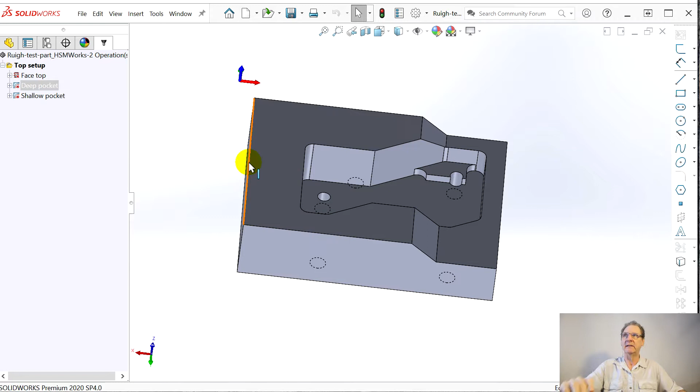Okay, a couple little wrinkles. I started with the part that we finished, or we didn't finish, but the part we started with the pocket and the facing. And here it is, face the top. But you see, no tool paths are showing up. That kind of, I had to edit and redo them. Let's try this, I saw a new button, generate toolpath. Boom, so there they are now.

There's a deep pocket, I think that's only because I made it in the demo program. And hopefully when I close this, we'll know next show. When I open it, the toolpaths will be there, I won't have to regenerate. So we got the top of this face done. Oh, let me show you the stock.

We created the stock. Here's part 0, positive X to the right, the way my Avid Benchtop Pro works. Positive Y to the back. So let us put part 0, all clean, like it better than SolidCAM, which is the most capable, but $5,000 and it's not even full 3D.

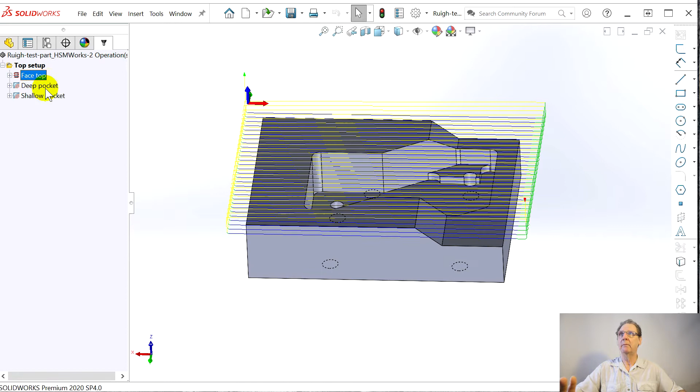So next thing we want to do, as I promised, we want to do the perimeter. We did that, we faced the top, we did this deep pocket, we did the shallow pocket. Now we want to do the perimeter. So let's see, they don't give you the choice here.

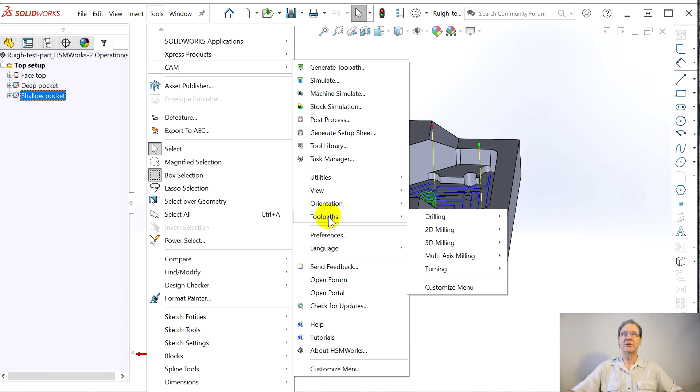I made a mistake in the thing because if you go Tools, CAM, Toolpaths, this is just a simple mistake. Okay, programmers? This shouldn't be called Toolpaths, this should be called the same thing. See, drilling, milling, it should be called the same thing when you right click here and it says Operations. So that shouldn't say toolpaths, that should say new operations.

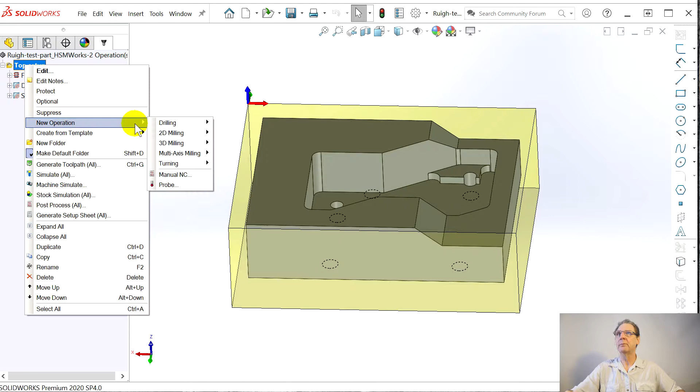So when I went back, I couldn't find it, I was looking for toolpaths here, and really what you're supposed to look for here is operations. Same thing up here, it's the very first one. But in our setup, and setups where you arrange XYZ and put the stock in. So let's do new operation. I've already lost it, look at this. Unbelievable. New operation, it's 2D and it's a contour.

One of the things I love about Visual Mill is it remembers the last tool you used and just defaults to that tool. SolidCAM, you've got to click twice to select the tool you just had, which seems silly.

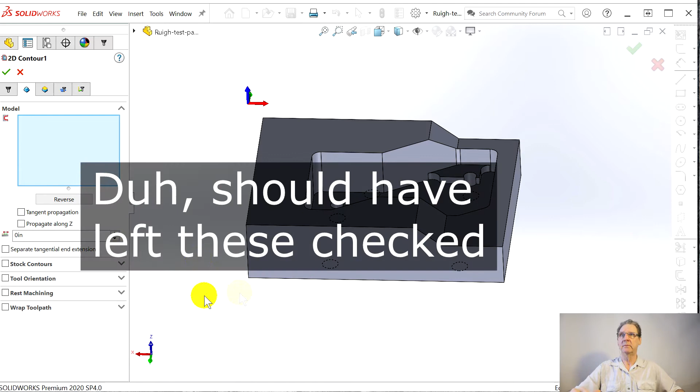For geometry, it always wants to help you, but the general assistant manager default always comes and screws you up. It's probably like MasterCAM, where you pick the edge you want to machine and it makes the direction. Let's try it, clear selection, let's go here. Yeah, so it works like MasterCAM, but they don't tell you.

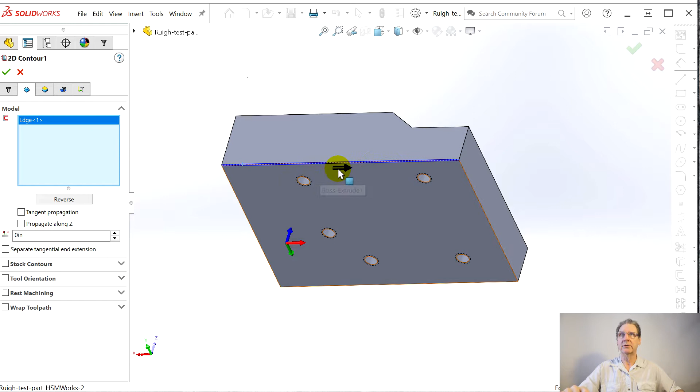To climb mill, I want to go in the other direction. Now it's the wrong way, so let's say reverse. Okay, and then once it's got the direction, it maintains that direction on subsequent clicks—at least it seems to. So there we go, that's all we need.

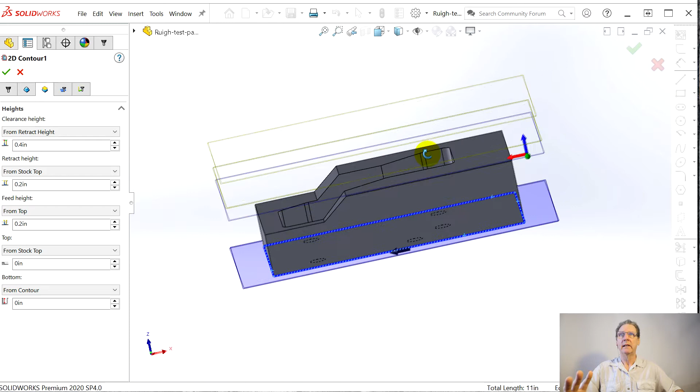I think it's going to need stock contours. Let's just keep going. Now heights, this is pretty cool—it's smart enough, it always wants to go to stock top here, right?

I'm getting to understand, okay, that's the retract. And this is, or no, that's clearance height. This is the retract. The feed height is a little bit below the retract. Stock top is not right.

And this is that thing we learned, okay, this is where they're calling the plane, this is the deviation from that plane. So I could enter a deviation, but really what I want to do is from the model top, because we've already faced this, right? That's where the cut has to be. It's smart enough to know the contour is here.

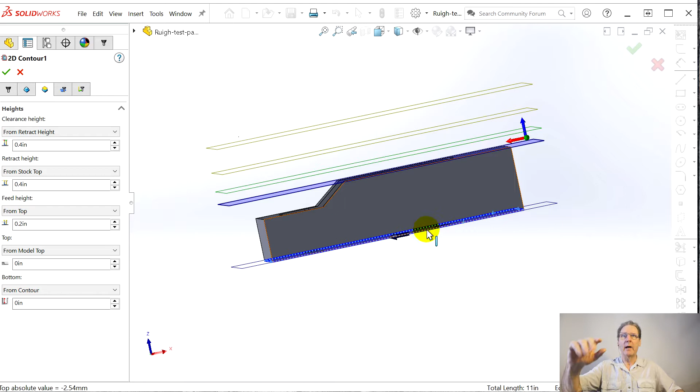But remember, we want to go a little bit below this edge here so that when we flip it over and deck the bottom, there's not a razor sharp edge where mathematically the tool just might have left a thousandth or two. So here we just go minus 0.02.

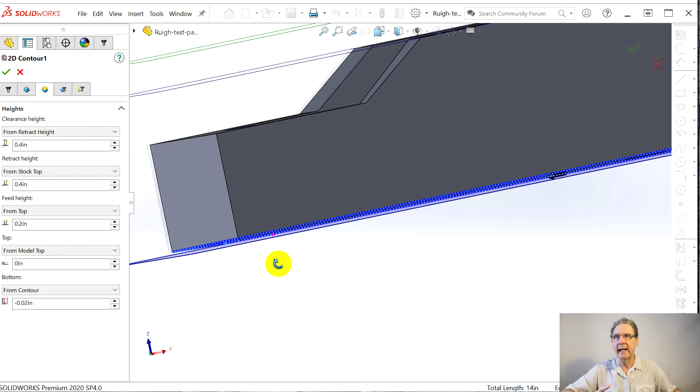I think you couldn't quite see it, but you can see it there—see it? Just that little gap. So now it'll undercut a little bit, or overcut, however you want to call it, and we won't have a sharp edge.

I'm really beginning to love this interface. Once again, you hover and you can see things, what's going on. Radiuses, this is a tolerance. Smoothing, I think this is climb over here—yeah, climb milling.

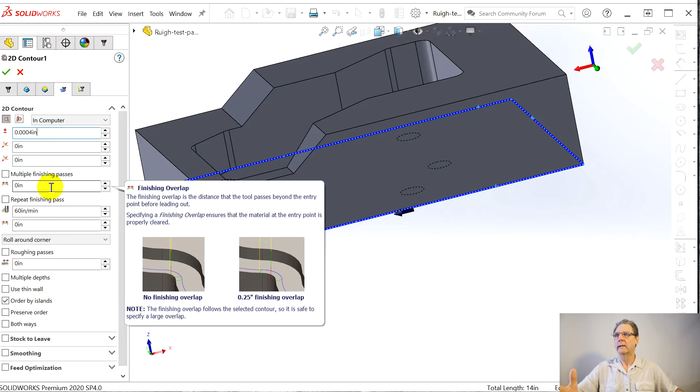Let's see, repeat—it needed roughing pass. See, and then I lose it, I click that, and then I can never find what happened to the word roughing pass. This has been a constant. Okay, there it is. And I don't want to rough that often, I want to rough step over.

Finish only final, even step downs—let's not worry about that. All this is kind of normal stuff for all these programs. I want to go both ways, I want to climb. And then like this linking one, I haven't used it yet, right? So let's see what happens.

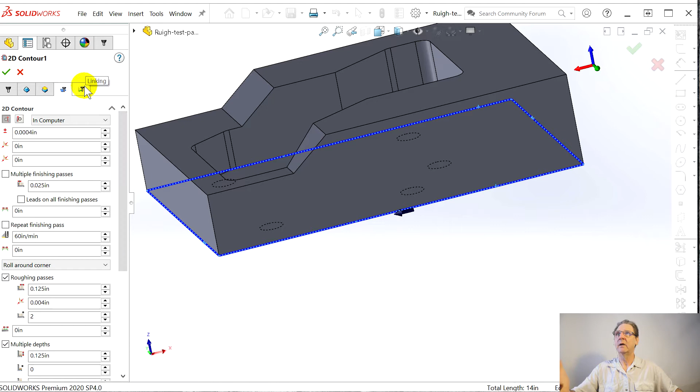There they are. And because I asked for 2 passes, it's doing a finish pass, which I'm sure you can fix—if you just want to do 2 without this thinner, narrower finishing pass. And it should be going underneath—yep, see how it's going a little underneath? Fantastic.

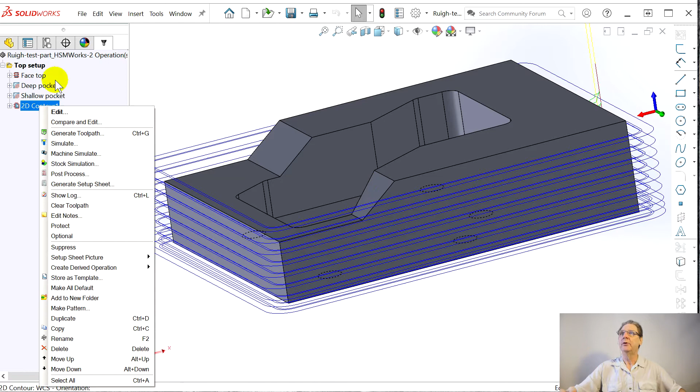And then the simulator—here's the one deficiency, and I consider it pretty major. If you simulate now, the program is not stock aware. It doesn't realize you've decked it, done that, and it'll just show the stock that was left everywhere. You have to simulate it either up here or select them all 4 and then do a simulation, okay? But we're not going to bother because that's a pretty basic thing.

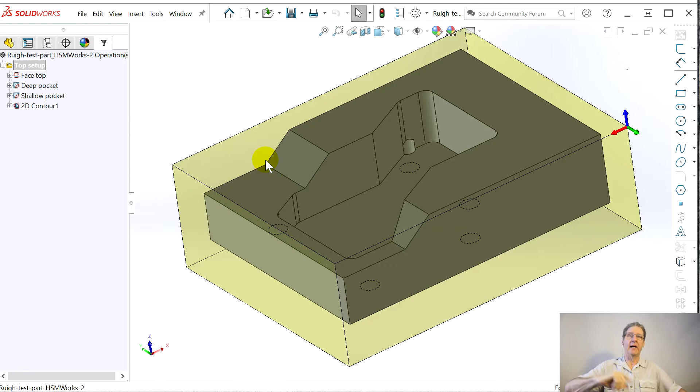Now what's next? You remind yourself, you go up here, it's like, oh yeah, we got to do this flat. Okay, this program, just like SolidCAM, is able to do this without a sketch, just does it a different way. With SolidCAM, you can select geometry point to point, so I could say from this point here to that point there, it draws a line for me and we'll contour and machine off this flat.

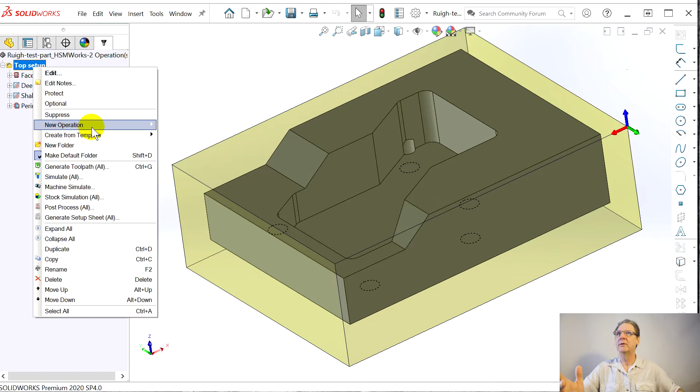This program, let's do a rename—this is perimeter, bang. And then, see, it bothers me, you can't select here, because like if you wanted to do one in between—I'm sure it lets you drag stuff around. You've got to go up at least here, find that new operation, and this is a profile, 2D contour.

Remember the last tool? See how much time we're saving? Now this one, I'll do it a little different. At first I selected both and it got real confused. Then I selected this one when I got it to work.

This time we'll select this one. It's a little, oh no, I had this stuff turned on, always trying to help. Ooh, look, it went and did the correct thing. That's the right direction, I want to be on the left, climb milling. So where the arrow is, cool.

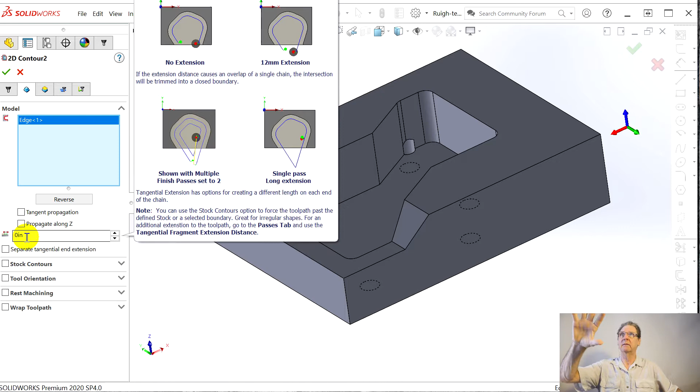And then there is a place, this is here, you hover, extension. I'm sorry some of it went off the screen because I got a multiple screen monitor, 4 monitors. It says tangential extension distance. This is a way to extend that tool path. So you can do both the beginning and the end, which we're going to try to do. Now, I think it doesn't say which is which, does it?

End extension, so we hardly want to extend at all. Let's do 0.1, see if it fixes it for us. But beginning extension, let's hover over here and say, come on, hover here. Well, it doesn't say beginning or end, but the beginning we want to do, what, 3 inches.

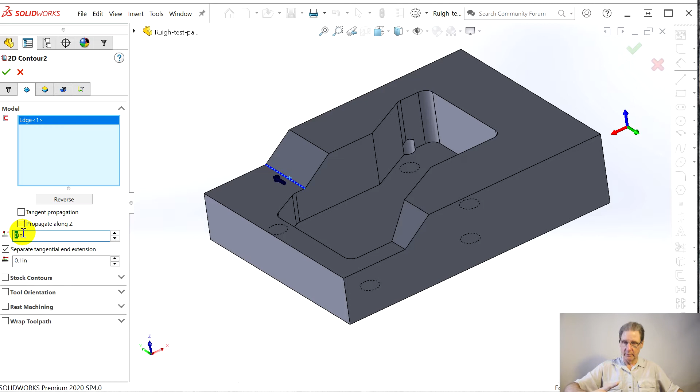Here, it's got it right, although once again it's stock top, it should only be model top. Keeps making that mistake, that's a little exasperating. This stuff, it was that roughing passes. See, where does it go? Okay, it goes here, I guess I see this, it rolls around the corner and gets confused.

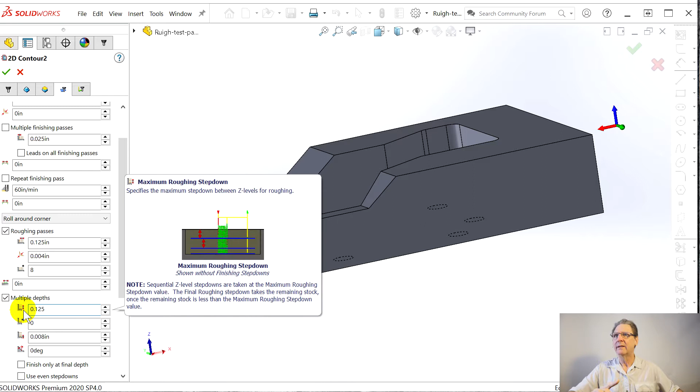Same thing, I want to go 125 and I want to do, I think I said 8 passes, 7 or 8. It's kind of silly you have to do it that way. And multiple depths. Oh, look at that, it lets me, the scroll wheel was changing that value, 125. I think that's all we got to worry about, right? Step down, finishing step down, we don't care.

Finishing step down, wait a minute, what was that? The size of each step down in the finishing, 8 thousandths. Oh, we'll let it do its thing, right? All of this, I'm sure. Then, let's say generate toolpath, see what happens.

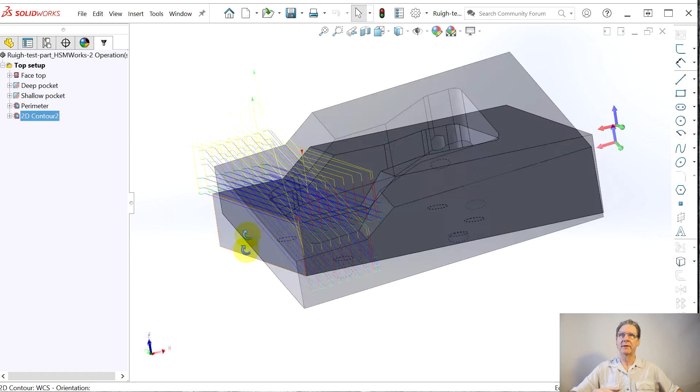There it is, I guessed it right. 3 inches is obviously too far. We can go change that. See, it dismisses the dialog every time. It's a little clumsy, but that's not the end of the world, right?

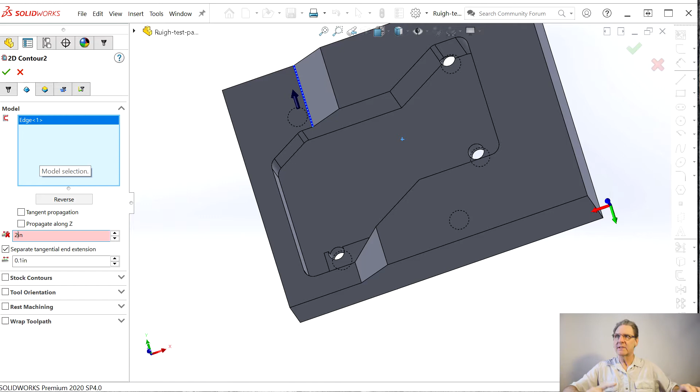So where were we? Geometry. Instead of 3 inches, let's do 2 inches. Did I hit one by mistake? 2 inches, and say yes. That wasn't enough, see, this is where it gets clumsy. You gotta go edit, you can't double click to invoke it. 2.5.

But there it is, right? Fantastic. So rather than, what do we got, 13 minutes in, we're going to really rock. Now we're going to do a 3D.

We want to do these slopes like we have in all the programs. When MasterCAM does them, okay. BobCAD, you got to do 3D extents to kind of fool it. With Visual Mill, there was fooling around with the tool. Watch how this one does it.

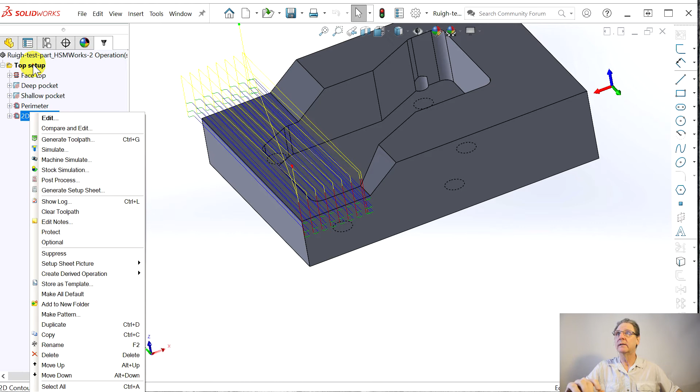It's great, let me see if I can. Oh yeah, you don't do it here. It's a little annoying. Oh, wait a minute, this is flat.

Okay, go here, operation, 3D milling, and it is a parallel operation. Same tool, that's a genius. This part was designed by my buddy Dave to trip up CAM programs with automatic this and automatic that, but it's mostly this tool.

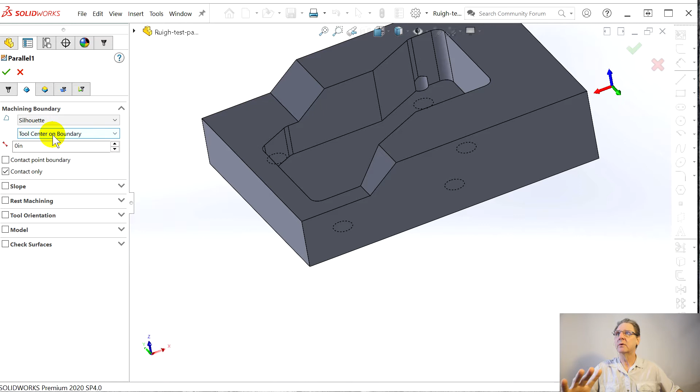You don't want to do, you want to select them, select this patch and this patch. And then I think that's it. I don't think you got to do that. I don't think, see, it doesn't matter.

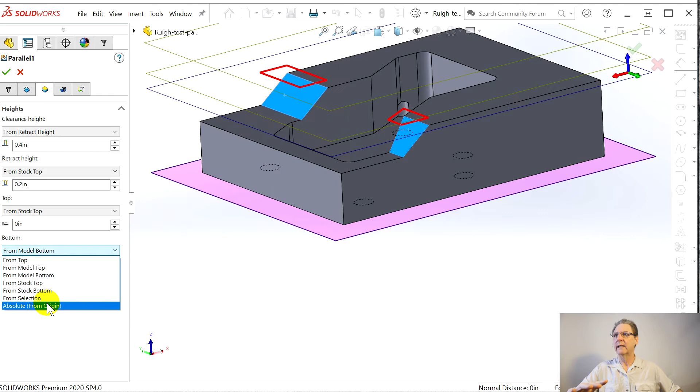Then here, the heights, from stock top it's got. Let's select this one, we only want to go down to this level, so let's put the face there. Here it's done it wrong again, from model bottom down there. Okay, so that's cool, everything's happy.

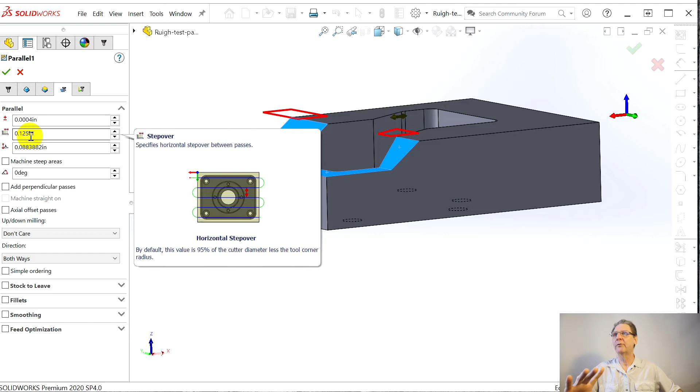Parallel, this is all the tolerance business, step overs, this is where we want a fine step over. And watch how wonderful this is. Just hover, great help. Unlike BobCAD, zero help. This is fantastic, like Visual Mill.

Cusp height, the SolidCAM help is good too. Cusp height, so this is telling us, I assume it's smart enough. Of course, see, it's already assuming it's a ball mill, and that's Dave's genius. No, you leave a flat end mill and you come down this ramp. Instead, I was taking a ball mill across at first, big mistake, but it's smart enough to do the math for you.

So if we say, no, I want 0.02, it's saying, well, at least if it was a ball mill, that would be the cusp. I don't think we're going to be quite that bad because of the angles and the geometry.

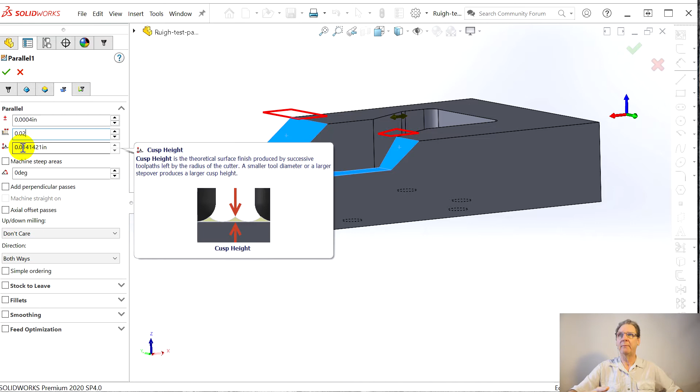We'll see, this is the degrees, whether you're going this way or down. I think I left that there. I want climb milling, I don't see both ways—one way, I guess that's as close to climb milling. Let's say, do it.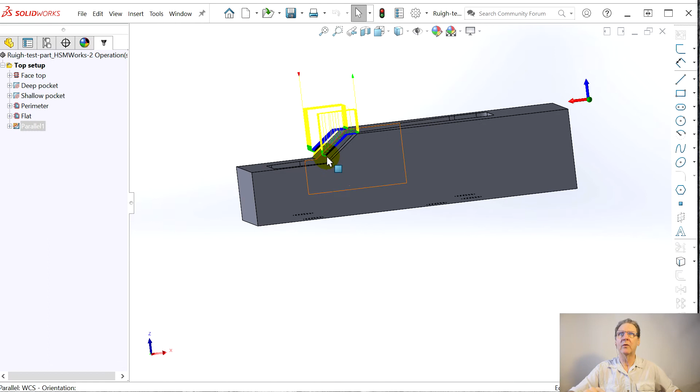Okay, so like VisualMILL, it only goes to where the center of the tool touches the thing. Now that's going to be in here. Let's change the name to slopes.

And can't double click, you got to right click edit. Minor annoyance. Where was it? Would it be in passes? Something about the tool, maybe it's in geometry. Tool orientation, was that it?

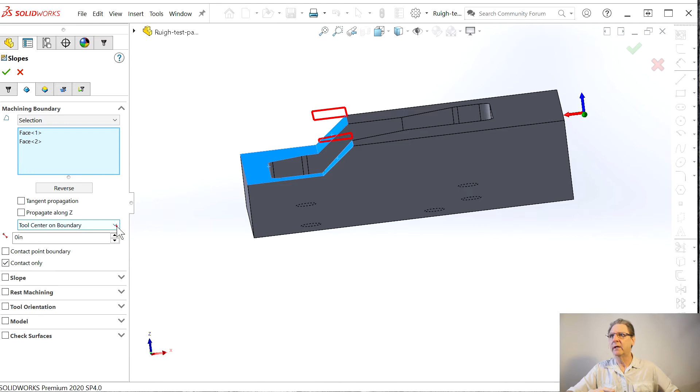No. Oh, tool center on boundary—here, so tool outside the boundary. Now do it. And see, now it's going, it lets the center of the tool cross that boundary and goes to the edge. And when I was doing VisualMILL, I think it was the same kind of thing.

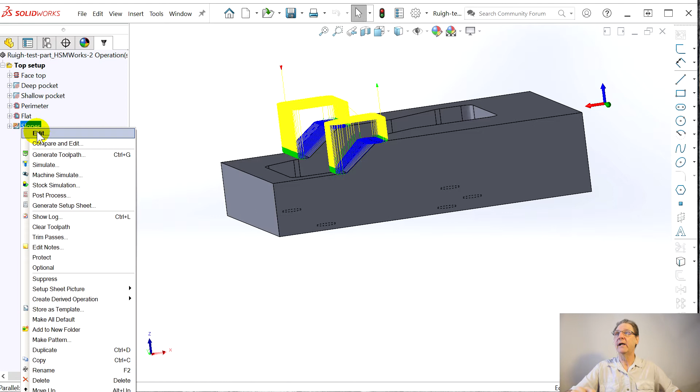And you're like, oh, it's going to scuff the top here. And because it goes all the way here, it's going to scuff. Watch what the fantastic Danish programmers did for us. I'm not sure I can find it real easy.

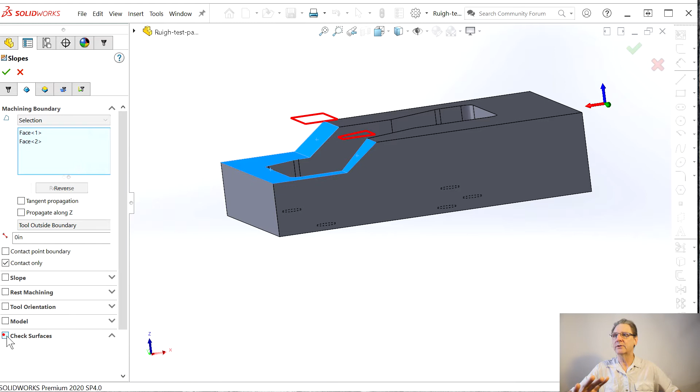Check surfaces, it's in geometry. So you can say—and I think, well, you remembered that it was doing the top. There were tool paths up here touching the top. Watch this, check surfaces. This is a check surface, and this is it.

And this says don't get any closer than 4/10,000ths. Well, my mill probably isn't that accurate. Let's go 1,000th, which means the tool, when it comes down here, it'll stop 1,000th shy. It won't touch that surface and scuff it, but it'll just have the tiniest little 1,000th inch step in the corner here that will be probably unnoticeable, right?

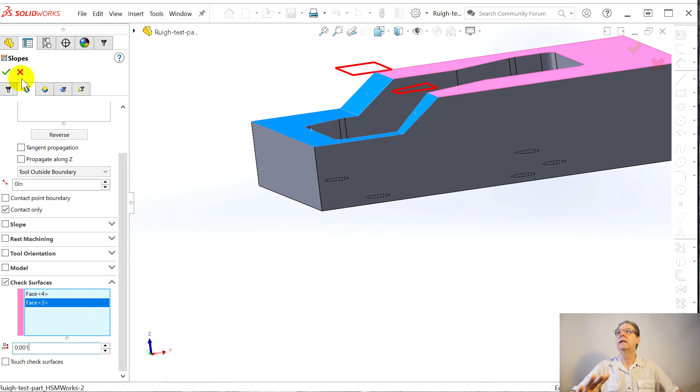Let's go here, I'm so excited, this is the coolest thing ever. See? Notice how all that tool path up here disappeared. The other thing I love, you're in SolidWorks, so this kind of stuff works, right?

So there we go. Now, minor annoyance, like I say, if we simulate now—well, let's show you why this is goofy, you'll understand what I'm talking about. I don't have a machine defined. That'll be another show when I figure that out.

For now, it's just stock simulations. This simulate is like what MasterCAM calls backplot, or, it just does a toolpath. There's no stock, there's no nothing.

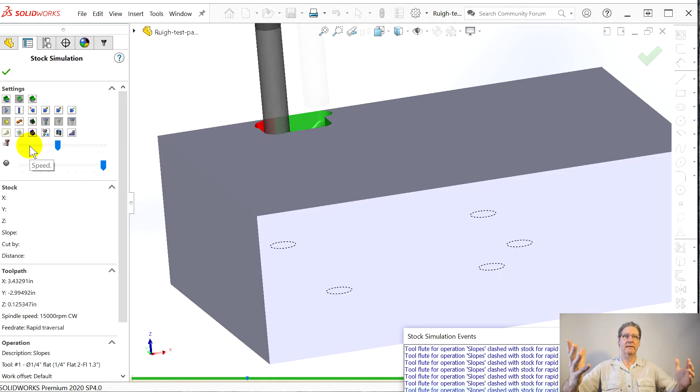Stock simulation. Now, if I go, yes, see, it's not stock aware. It doesn't know that, well, no, none of that's supposed to be there. And it shows all this stuff in red and who knows what's going on.

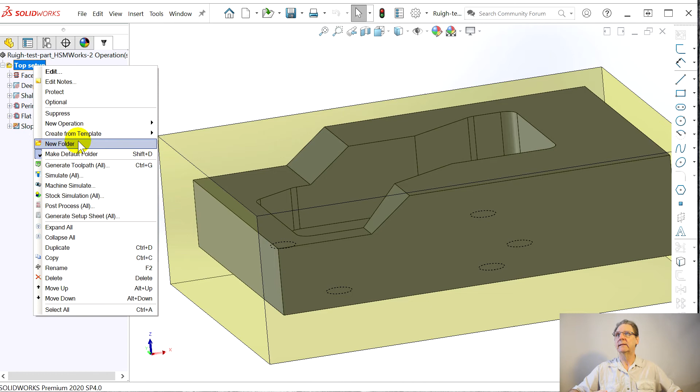So to get the simulation you really want, you could either select pertinent ones, like I was holding Shift key, hold Control key, you can select certain, but just as equally, you can go up here and click and say, not machine, stock simulation. Stuff still hops around.

And then this one you can do here, generate stock until next. There was the top, there's the deep pocket. Let's move it so you can see where once more. There's the shallow pocket, notice it's not leaving those artifacts, those little stripes this time.

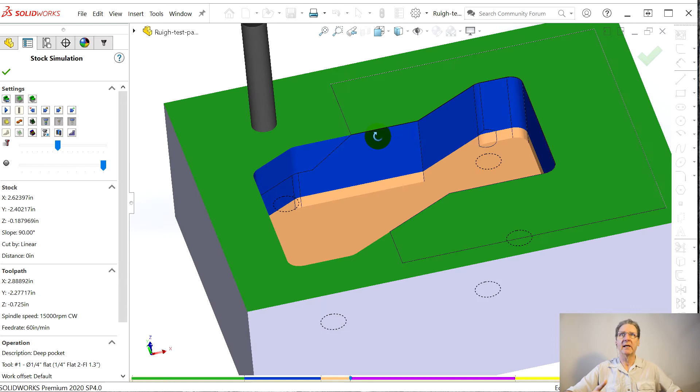It's actually cutting clean, which is kind of cool. Don't know why, my rounding error is different. And then what are we going to do? We're going to do—you can trust me to say, yeah, the perimeter, it's undercut. Now we're going to do the flat. There's the flat, and now we can simulate what we want to see.

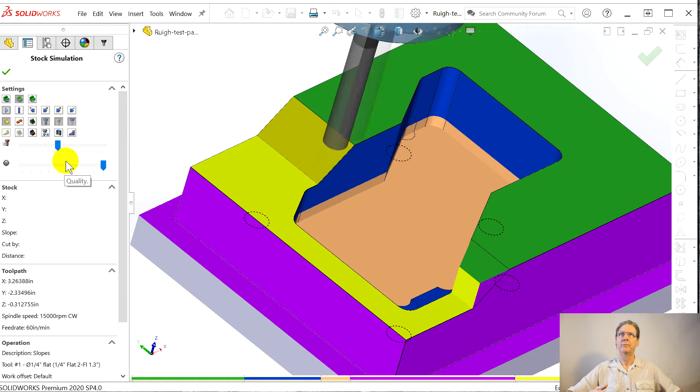And unlike the other programs where, because of the mathematics and the geometry, it would leave a little stock right here, this one isn't. Right? I think MasterCAM worked like that. There's no excess stock right here, right, on that corner.

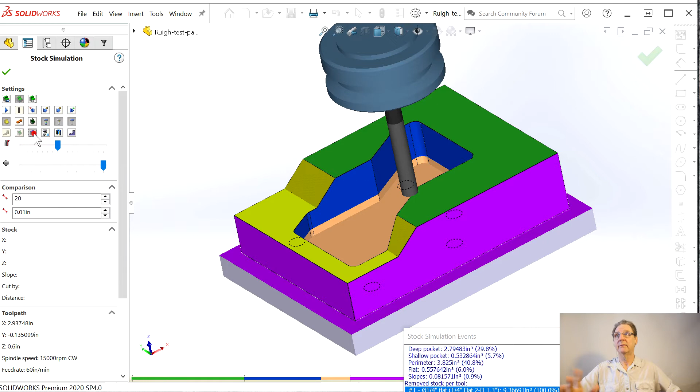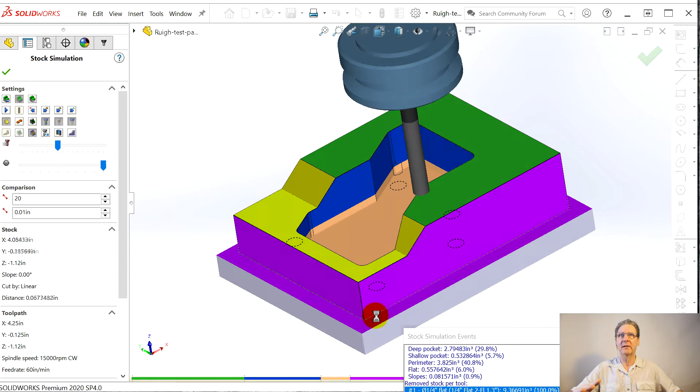I wish I had the SolidCAM simulator, or Visual Mill works the same way, or even SolidWorks CAM by CAMWorks—color codes. Why they use 20 shades of gray, and you can set that. I'm going to do, it's hard to see where the gray starts and the different shades of gray. Let's go up here, I guess you can kind of see them, right?

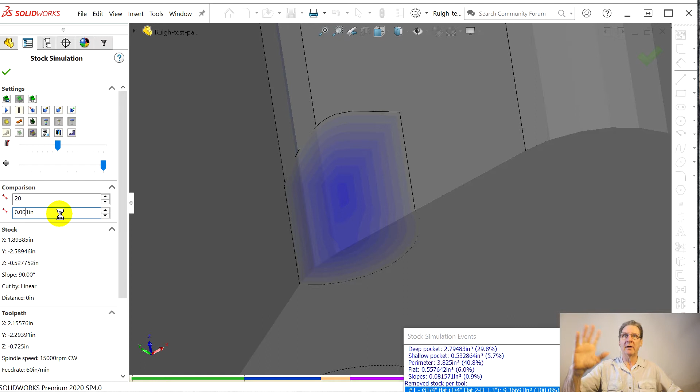This is the Steve Jobs school of a pixel different, and you're supposed to think it's clean and cool. I add a 0 right here to the, how much per shade. So there's a 0, it's smart enough, it's fantastic that they do it. And now you can see there's 20 shades of gray, just 1/1000th of an inch each.

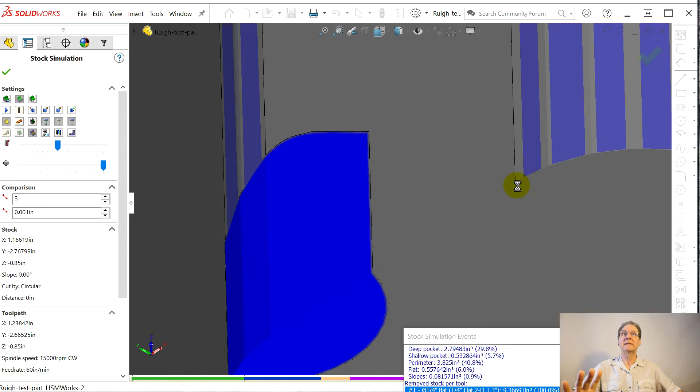You can also do—I was playing around—3 shades of gray. Or no, that's 32, sorry, 3 shades. And it becomes even a little crisper. But that's showing some, not artifacts, but I think that's really saying there's math. Is it rounding error in the math? Why is stuff showing up here? This is probably operator error, but it's still, it doesn't get me as confident as the SolidCAM simulator.

SolidCAM, boy, my brain's spinning with all these 10 different CAM packages. But good enough, see, you're not in that horrible simulator that MasterCAM and BobCAD use. They use a ModuleWorks simulator. So here you are, fantastic.

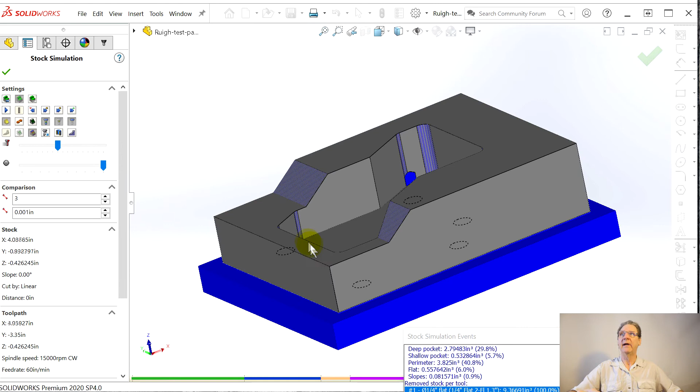When you don't have the compare function, it color codes each tool, each operation a different color. So that's cool, we're done. Let's see, we got 10 minutes left.

Okay, so next we want to do what a machinist would call a setup, what everybody I know in the history of Earth calls a setup. They've decided it's called a job, which is what the whole part is. But that might be a Danish-English translation problem.

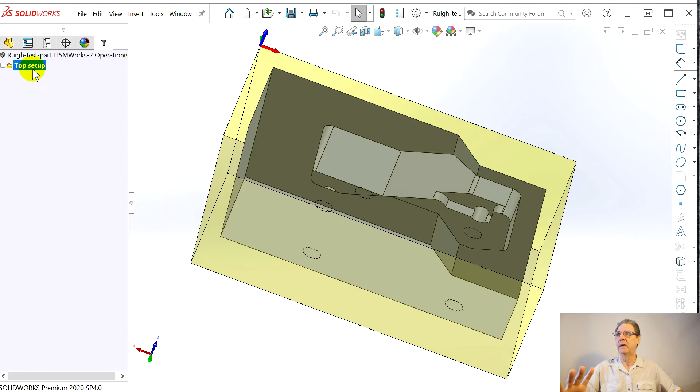Right click here, I think it's look for the new job, new operation, new folder. No, you can't see, you got to go up here. Now if you have the evil of all evils, the command ribbon, then you can do job up here, right? But then that robs down here, and this is amateur hour. And why are you going up here?

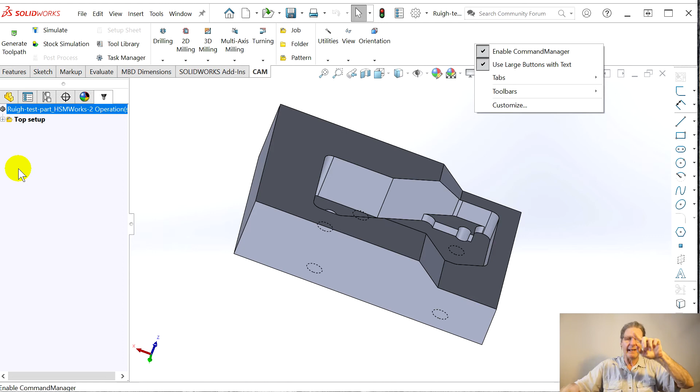Everything you want the mouse to be in this area. That's what's so great about not having these giant dialogs like BobCAD and SolidCAM. You're always concentrated in this one area. And this fallacy of, well, if we spread everything out and put all this space, it'll be simpler - it's not, it's worse. SolidCAM does that, and they don't label any of the icons. And you got to hover, and okay, that's what that is.

I got to do that all concentrated here. So enable the command manager. Go back to what we were doing. Sorry for that rant. New operation, no - new job, here it is. I can't figure out, you would think continued machining from previous job.

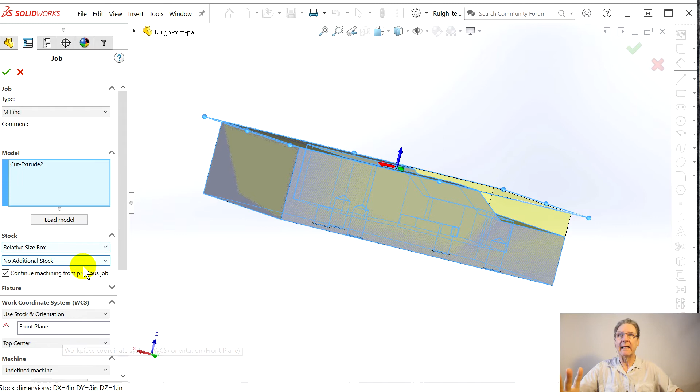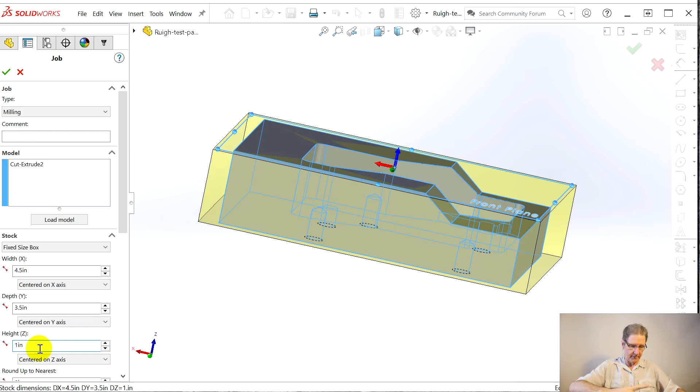But it still has stock. And it took a while to figure out, oh no, that's the relative size stock. See, it's here, so you got to do it all over again. This is madness, this is truly a major deficiency. So you just got to do what I already did once, 4.5. At least they do things, once you're used to it, like anything. This is why the programmers or the marketing people don't think it's a problem, because everybody's used it their whole life.

So you set the size, and then you don't want to center on Z. What is it, Z plus, I think. And then you can make that number smaller, I think make it 1/10. And that's where it was, right?

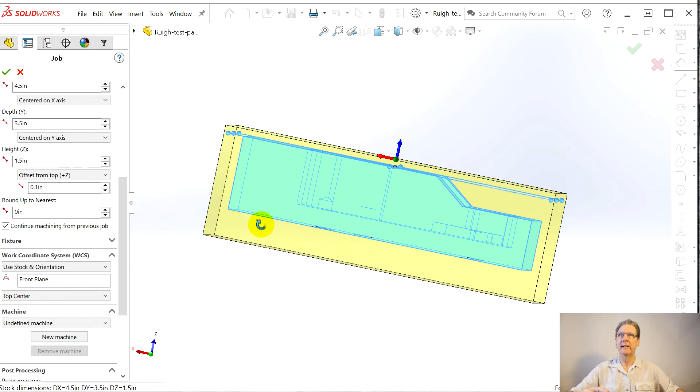Next problem is the coordinate system. We're going to flip the part around like that, make work 0. You can't make work 0 the stock now, because thicknesses in stock will change the thickness of the part. You got to refer to the part itself. So this will be a little misery.

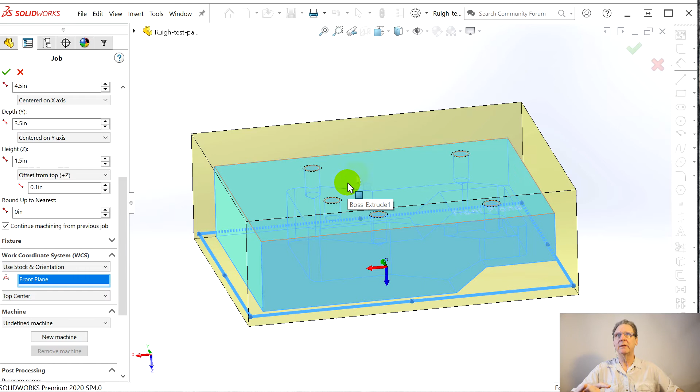Does it let me reverse? Maybe it'll let me do this one. Yes - now did it move the stock on me? Yes, it did. So now we got to go up, up, up, 4/10 up. Okay, so now the stock condition's right.

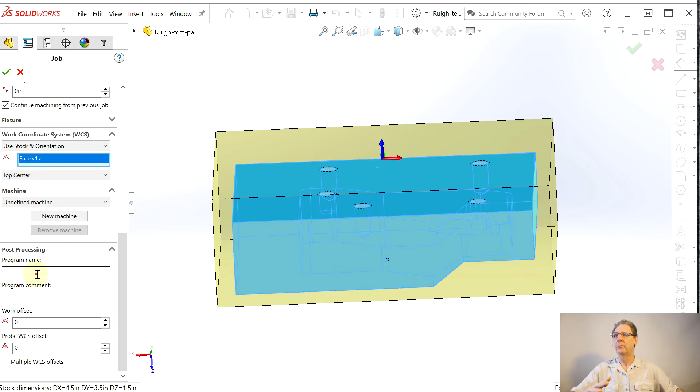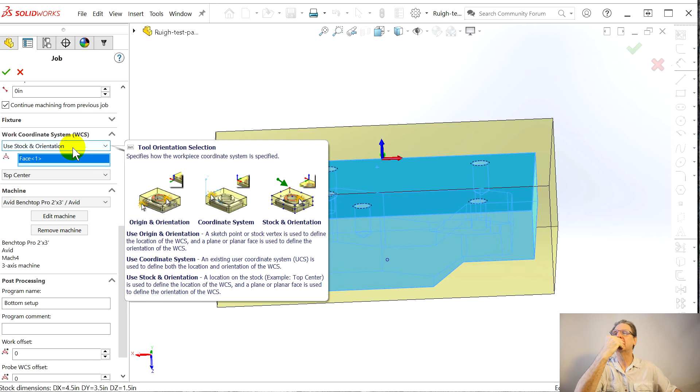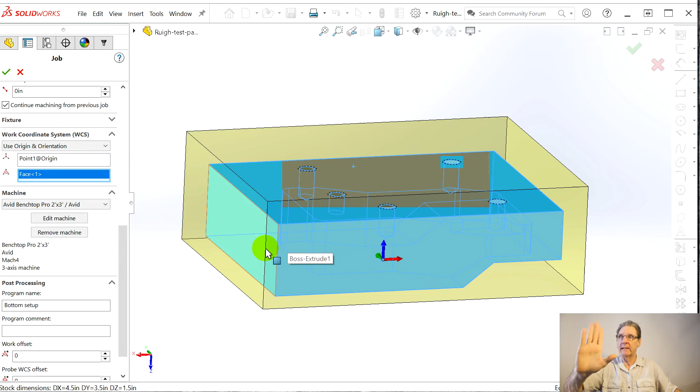Maybe it'll let me do it. Oh no, but we don't want - it's pointed in the right one, but what we want to say is origin and orientation. So Z is still pointed up in the way now that we flipped it over. That hasn't changed, this is always a misery. And where is it, origin? Hopefully if we go right here and select that point - oh, thank the heavens, it did it. Positive X is there.

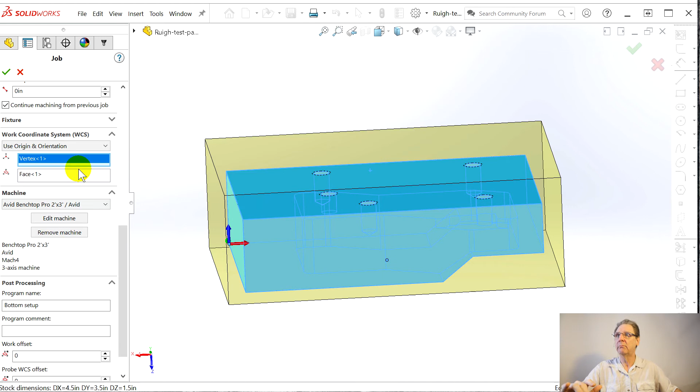Okay, so it's sitting in the vise, fixed jaw back here, movable jaw. We're clamping on the part that we just machined, that perimeter now. And there's - it's not showing us the true stock condition, which is a minor pain in the butt, but we'll give them that. I think we're done, right? We got our part 0, or work 0, some people prefer, depends.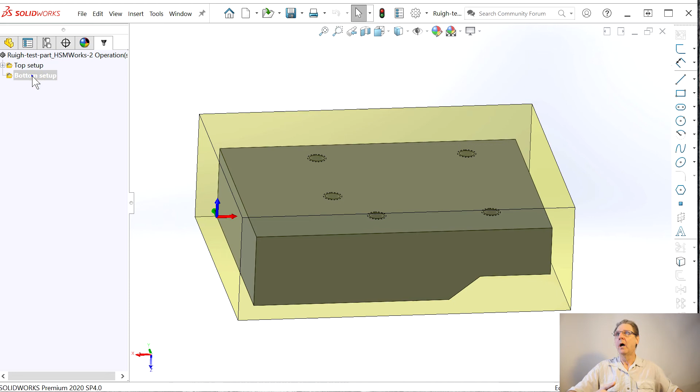We can rename it, if you double click - bottom setup. And then here, new operation, 2D milling face. It seems to be in the right spot.

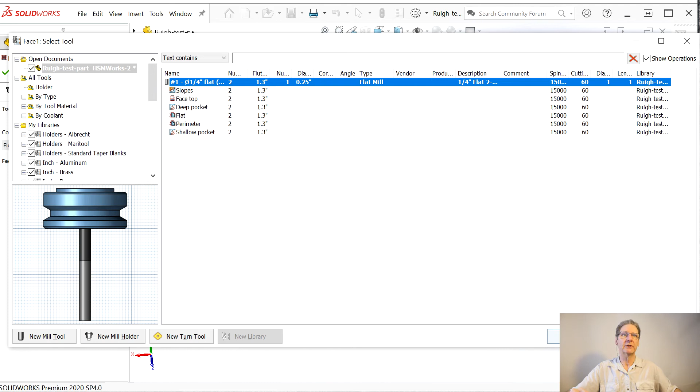It doesn't remember the tool across jobs. That's a little goofy, but library, here's our tool, right? And here's what that tool's been used for so far. So you just select it. You can't see that, but I hit the select button, my headshot was above it. So it's got the right tool. I think like before, you don't select anything and it's smart enough to know the stock contour, right? Heights.

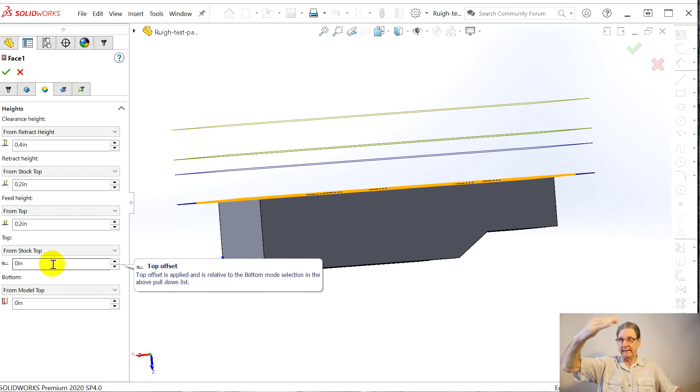I guess they want the heights listed in the physical orientation. This is just a semi-arbitrary thing. Even though you're changing the two bottom ones the most, they're on the bottom because that's how physically they align, stock top to model top. They got it right.

So now we can go. Where was it? We don't want to go both ways. Oops, from the other side. Climb. I'm getting excited, you can tell. No stock to leave.

I thought there was step over. We want to go 125.

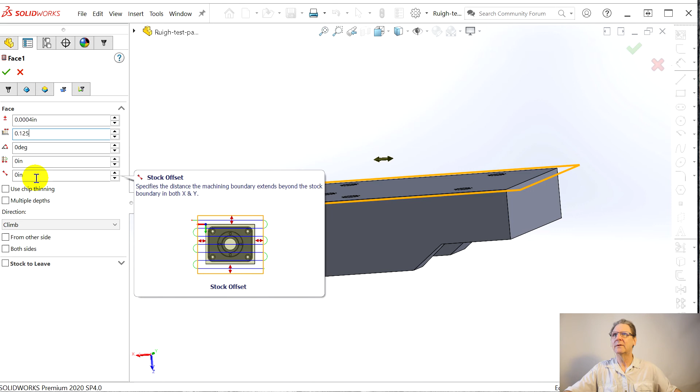Pass extension, that stock offset. Where did we set? Is it here in heights? Is it stock contours? I've already practiced this all day. Multiple depths.

Let's go 1/10 of an inch at a shot. And if we say yes, there they are. 4, 5 wax.

Huh. Maybe face bottom. Let's edit this.

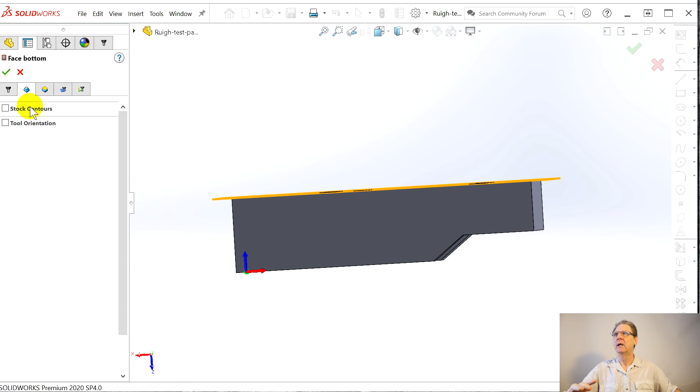I would think it's geometry. Or no, it's levels, I'm sorry. Instead of from stock top, we want to go, what happens? It'll go above, but it won't. I can't go from stock top.

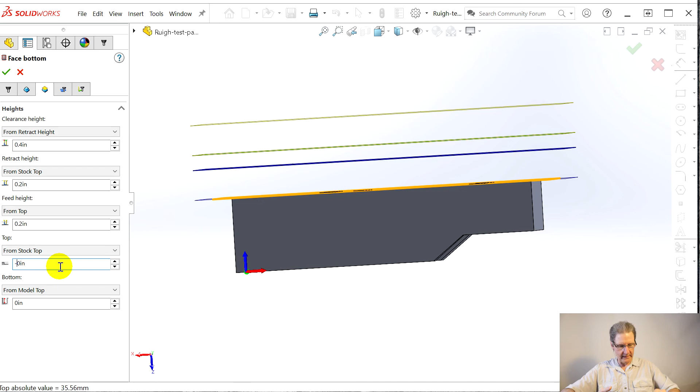Minus 0.1. Oh, I think it did it. Let's see, should give us 4. Yeah, and I'm not quite sure what's going on there. So there's our 4 levels.

Now let's do our simulation. Once again, if you simulate just this, it doesn't show you the stock condition carried across.

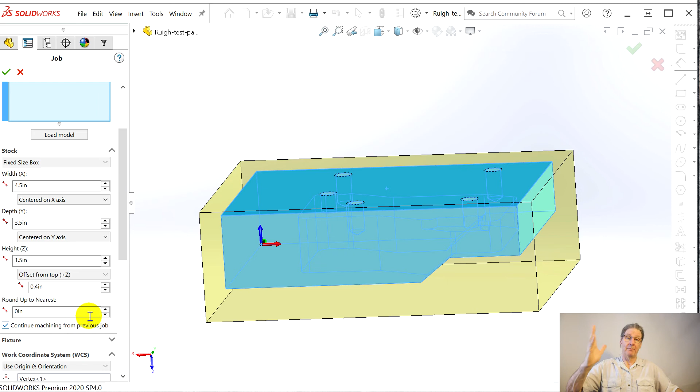I certainly hope, let's go check here, in edit condition, under stock, I had continue machining from previous job. I think that has to be done. Let's cancel out of this.

So light them both up, but you probably can light this up too and do it this way. No, I guess not. I don't know also why this is in bold and this one isn't, but that's life.

Right click, stock simulation. Okay, so it's showing the tool the right way, right? We're looking at it upside down. We're going to make our 30-minute show, folks.

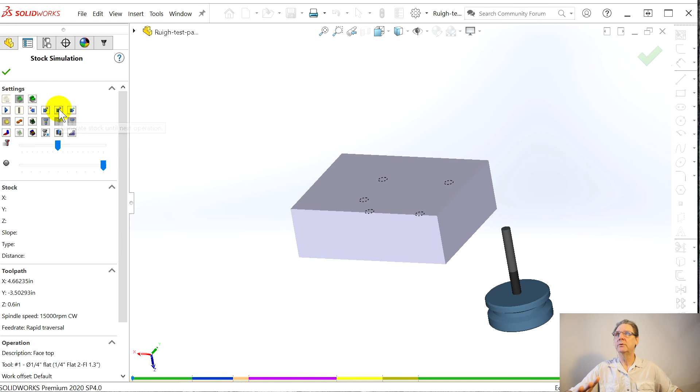So you can do here, it faced it, right? I'll show you just in case you don't believe me. Now it does a deep pocket. Now it did the shallow pocket. Now it's going to do the flats. Or no, it does the perimeter next. Now the flat. Now it's going to do the slopes.

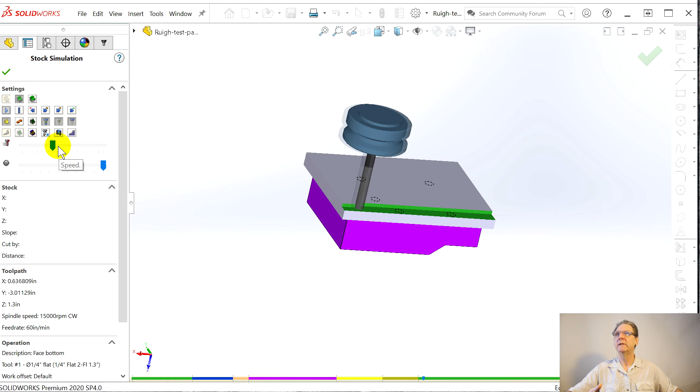And then if you want to see it do this one, I think we're slow enough. We'll go here, and I think we can speed this up. Here's this bug. Watch, I'll go up one speed and it'll be instantaneous. Oh, that's a minor problem.

And then the button of fantastic wonderfulness, the reason I'm never going to ask for my money back: compare. I probably don't understand the design intent, as engineers call it, of this comparison method.

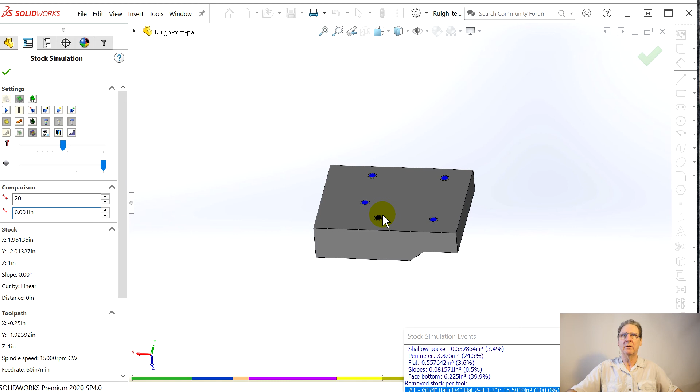Would it be something if there's a way to set it for colors? We'll add our 0, we'll zoom in. We should be able to see a different color. Why is it thinking so much?

It gave up on us. There we go. So let's just do 2. I kind of like that sharper edge. You know, once again, wish it was color coded.

Oh, this is interesting down here. Can you see that? The colors here. Is that pertinent? Can I click on them and do something? Let's go back.

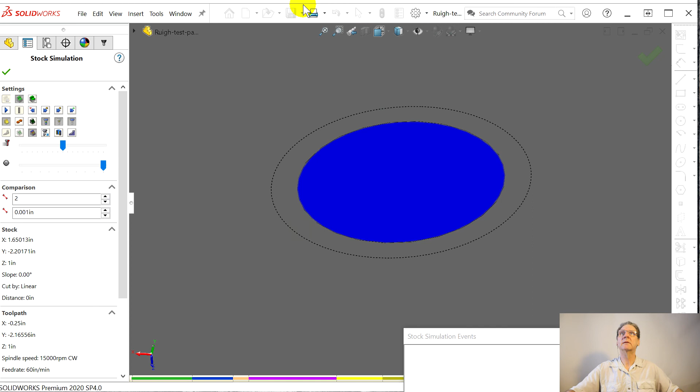Oh, is that stock simulation? Oh no, I guess it's going up to a point and it stopped. I don't know, I'll figure out what those pretty colors mean. Every time I use it, I learn something different.

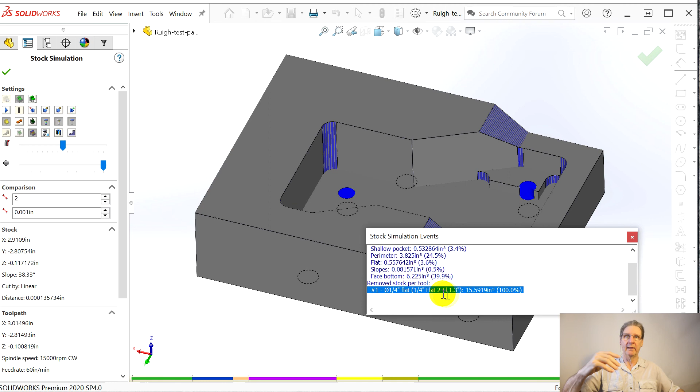So let's come here, give a nice pretty thing. This is volume of material. I'm looking for times too, I'll look that up on the internet. Where does this thing report the time per operation? I haven't found it yet, but I'm sure it's there.

And in the compare, you know, it bothers me. This is like Visual Mill where it's not quite showing perfect accuracy here. Probably user error, we're not going to pass judgment. Let's get out of this.

All right, that's HSMWorks. I love it. The more I use it, the more I love it. I didn't have to draw a sketch, got the easy way to extend stuff. I'm just delighted, right? Just delighted. Everything those Danish folks did - thank you, Danish programmers, you did a fantastic job. And you got my, well, Autodesk has my money. So we'll see you next time.

We'll do the holes, right? So it's going to be 3 episodes, we're going to have the part done instead of 4. So we'll just do the holes, and I'm going to have to practice that because, you know, it'll do 4 operations in one hole feature. I'll have to play with that a little bit. But meanwhile, catch you next time.